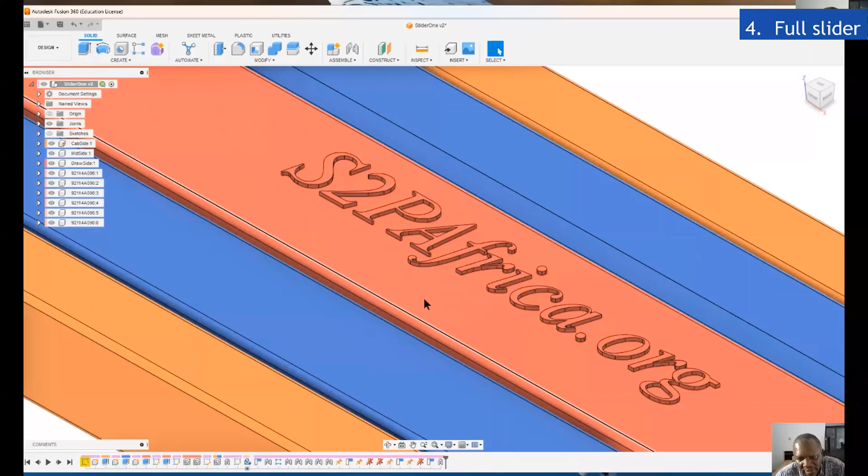Other enhancements are possible for our slider component. First of all, if you look here, in this particular case, we have put a logo on it. That is a logo of text, which is something you can also do.

Then we have holes that can take screws. And if you look at the back side, we have also added some specific screws, like 1, 2, 3, 4, 5, 6. These 6 screws are these components that you can see here. All these are enhancements you can use.

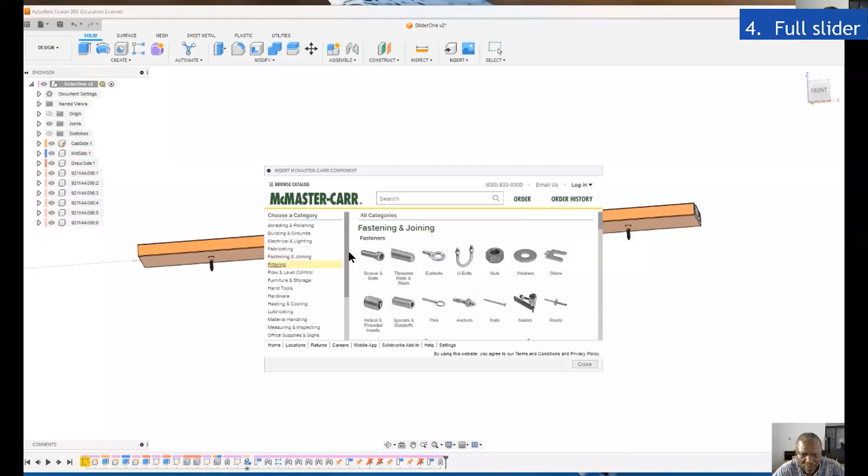You can design and make the screws yourself, or you can go and collect them from the McMaster-Carr Component Library. In the McMaster Component Library, you have hundreds of components there that you can add to your drawing, so you do not have to recreate everything from scratch.

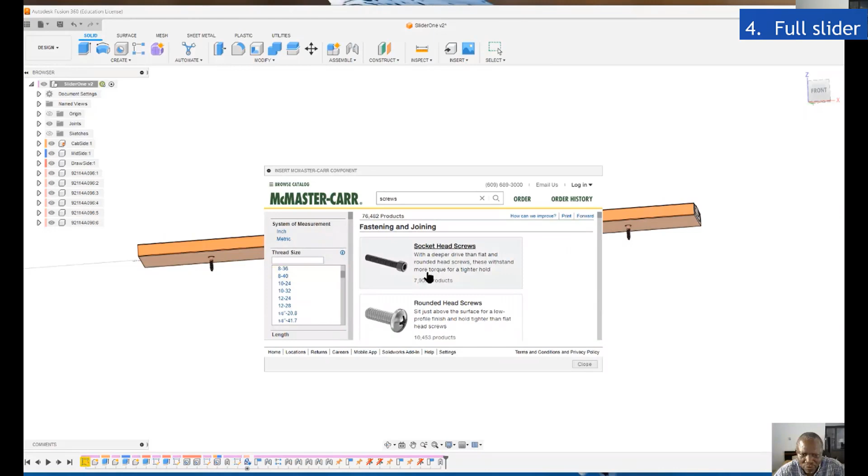For the screw, you get them from the section on screws and bolts, and from there you can select which type of screws you want. If you select a particular screw and you are happy with it, you can actually physically order them. You can decide whether they are metric or whatever, and then you can add the drawings.

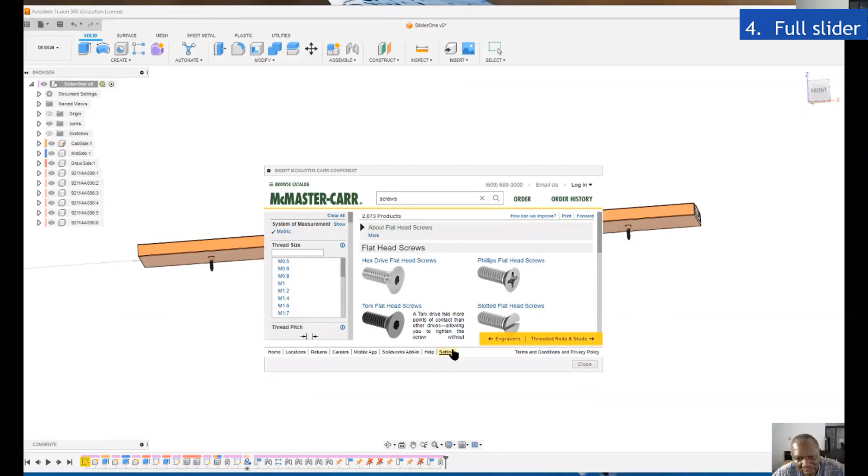You can add the drawings to your drawing, and then use them as components inside your work. So that's what we did here, so you don't have to. You could also make the screws yourself if you want.

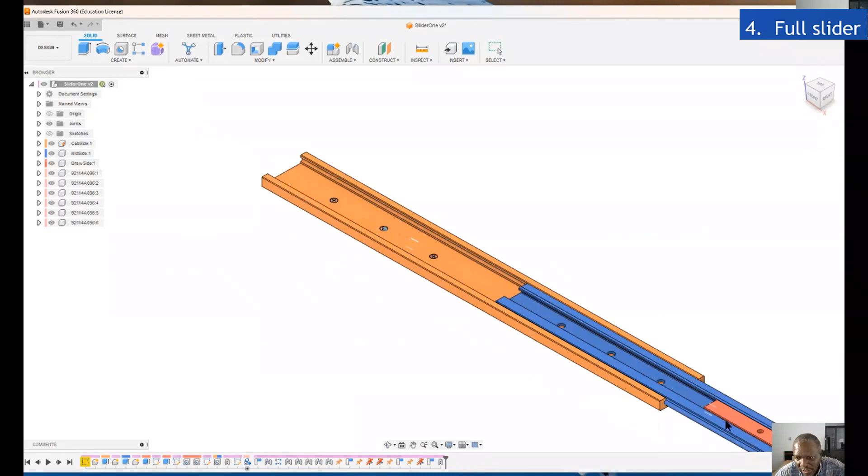Another thing we want to look at is that now the motions are implemented and enforced, so you can move this thing and then move them back, and you can change the maximum and minimum of the motion.

The reason you are able to do the demo of the joints is by animating them. You can take any joint here, like the slider joint, and say animate joint, and it will do the animation of the joint. If you want the second one to be animated, you can take the next one and say animate joint to do the joint animation.

But if you want to be able to move this thing up and down on your own, you have to ground one of the components. In this particular case, we did that by grounding what we call the cab side component, and you can see that by a pin on it.

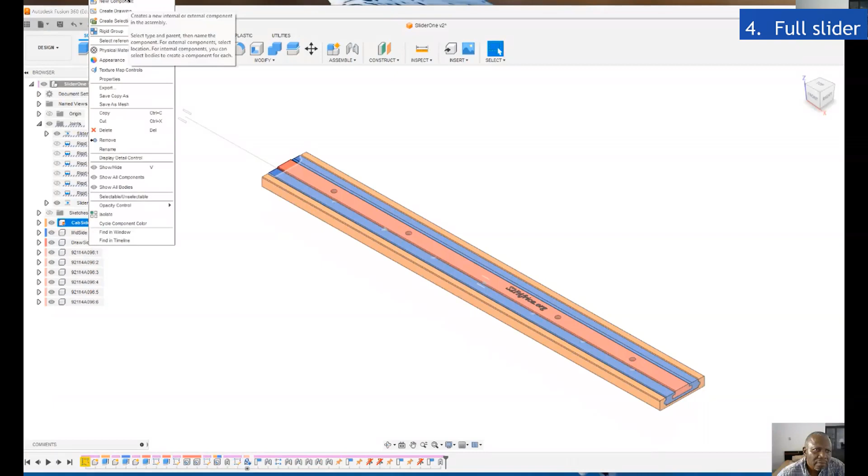How do you ground it? You can ground or unground by right-clicking, and after right-clicking, you go all the way almost to the middle. You will see. Let's see. If you want to ground... I'm not finding that right away. Yes, it's actually at the beginning.

So I've grounded that. If I want to unground, if it's ungrounded and I'm happy with that, if I try to move this thing, everything is moving together. So that is why it is good to first ground one of the objects.

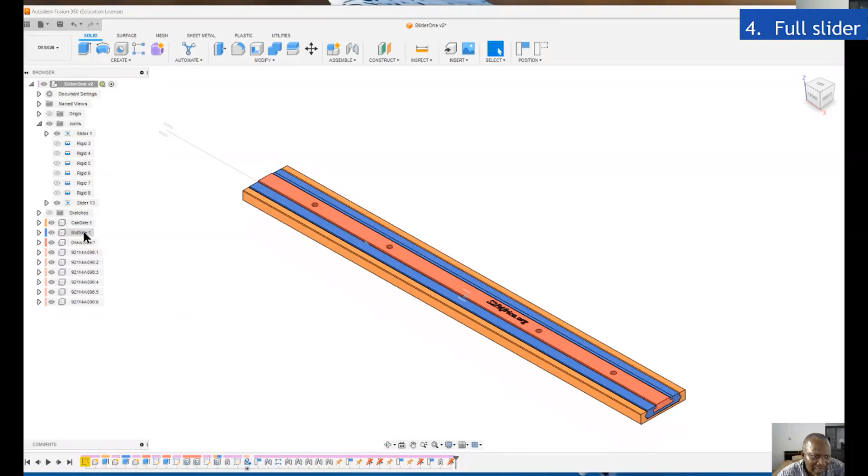If you ground one of the objects, take this cab side one and ground it, cab side. If you do the grounding, which is close to the top, and revert position, it gets grounded. Once it's grounded like that, you see that it is possible for you to actually control the motion. And then this is a fully ready part you can now use in your cabinet design.